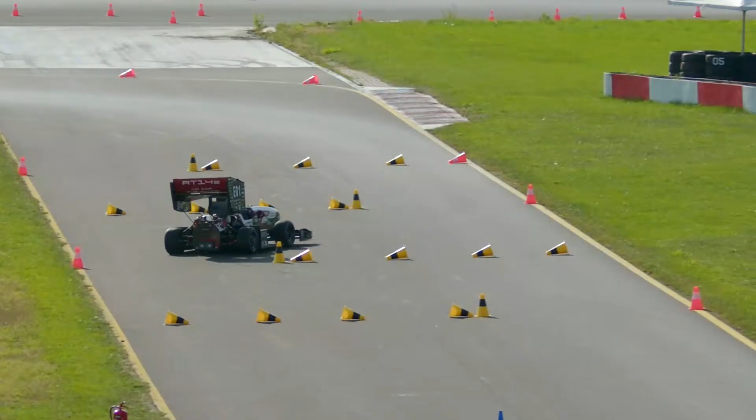The name Formula One came because the teams, the motorsport companies, were looking for the best formula, the recipe to create the car number one, the best car. And this is what these incredible minds, innovators and students, engineers are doing here. They're building cars day after day, night after night.

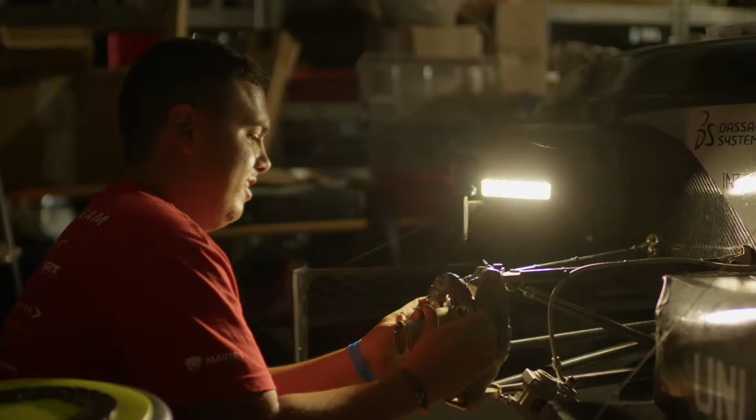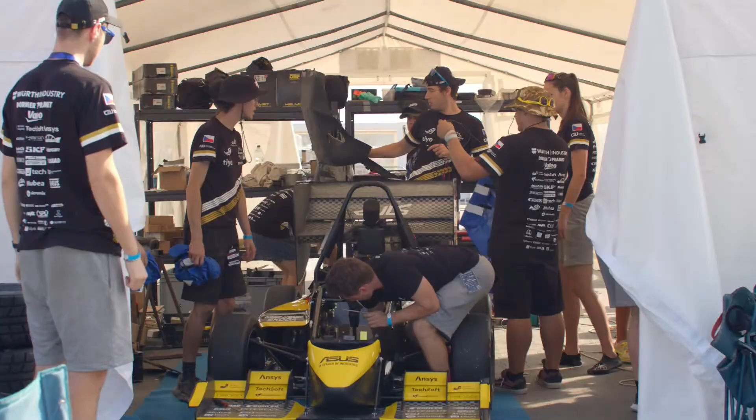Student teams from around the world build their own designs of racing cars, which they race on the track. But to participate in these dynamic competitions, they must pass rigorous stages of technical inspection.

And what is most valuable to them is feedback. Did they do what they did well? Does it even make sense from the perspective of how the industry perceives it?

I cannot imagine how incredible it feels for them to have been working years on a car and then see it on the track actually running. So I think the emotions today are going to be running super high.

These students had an absolutely incredible blast being able to finally end the season with a truly fantastic performance, and they really showed off on that track. On one hand, there was the competition regarding times, but we also saw that they were really enjoying themselves in terms of the overall execution.

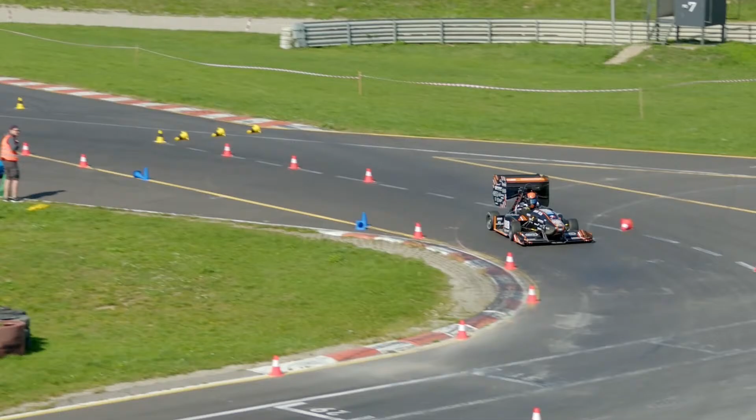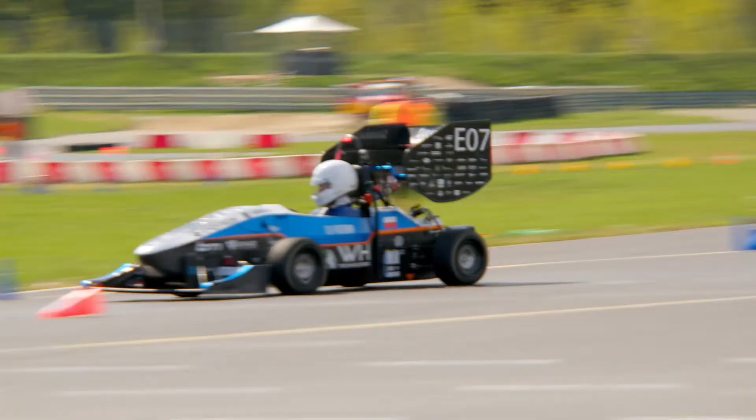Make your dreams come true in motorsport. Formula Student Poland, where the future of motorsport is born.

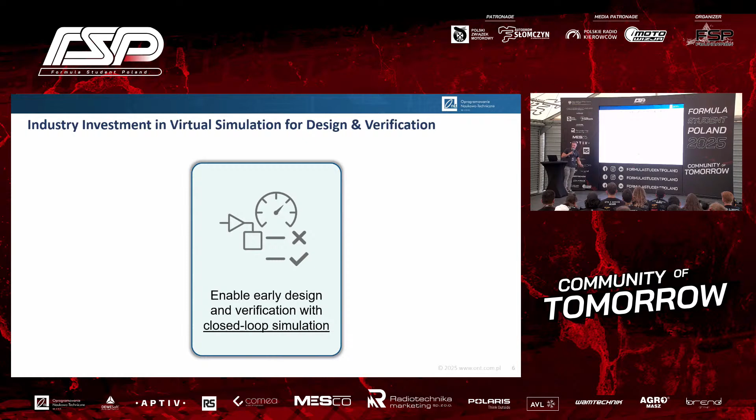So to begin with, let's mention some industry trends that are driving our recent investments in virtual scenarios. First, a primary trend is the need to leverage simulation for early design and test. This is especially true in the context of closed-loop systems that need to take into account vehicle dynamics. Engineers want to reduce the amount of time spent on physical testing in the vehicle.

Second, there are many different driving simulation tools on the market today, both commercial and open source. All of them can be used during the design and testing process. The ASAM organization has been working to make it easier to interoperate between driving simulation tools with standards called OpenDrive or OpenScenario.

Another trend is that to maximize simulation value, the scenarios under test must be representative of real-world scenarios. What does this mean? We see a lot of companies working on taking logs from recorded data and building equivalent virtual scenarios for the simulation.

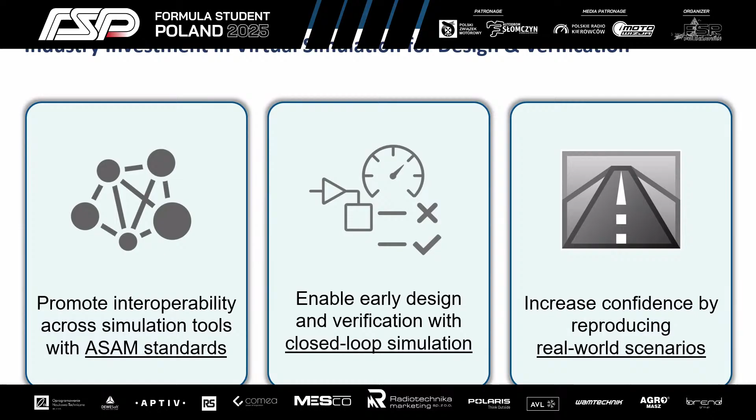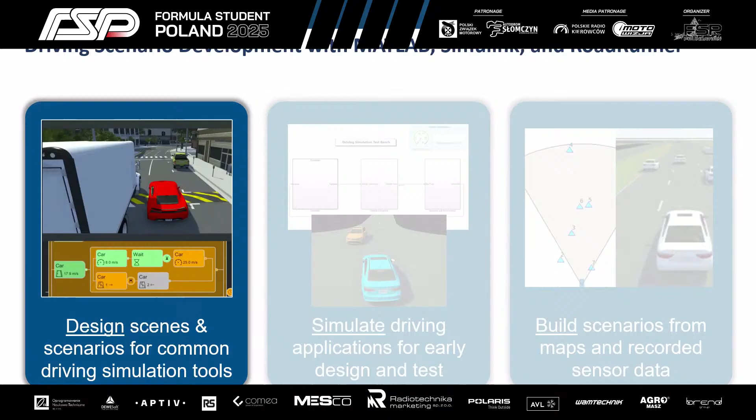And we have an answer using our tools for each of these trends. Today, in this presentation, we will discuss the value of virtual scenes and scenarios, and I'm going to introduce our RoadRunner tool that integrates with common driving simulation tools, and also, of course, MATLAB and Simulink. I am also going to show some example applications from industry and from the Formula Student competition. My friend Kuba will later tell you more about building and simulating vehicle dynamics models in the next presentation.

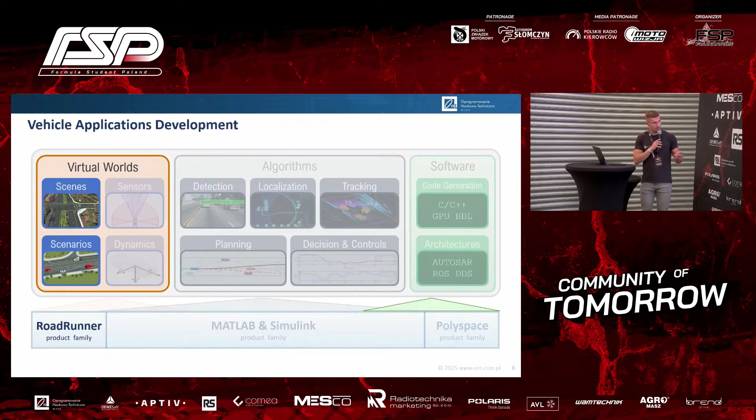So now let's compare the application called Driving Scenario Designer from MATLAB with RoadRunner tool. Scenario Designer is an interactive app from Automated Driving Toolbox and allows us to design simple road networks with intersections, some basic elements like walls or traffic barriers. In terms of scenarios, we can create them manually by selecting coordinates, and the actors are interpreted as cuboid objects.

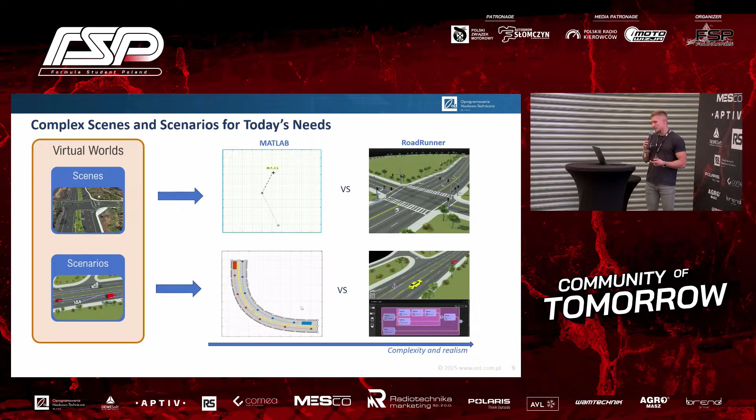On the other hand, RoadRunner tool can consist of advanced state machines and logical expressions, lines, actors, some lane following behaviors, and all these scenarios are presented in photorealistic reality with high level of fidelity.

Someone may ask, what's the main purpose? As you can see, there is a timeline. Automotive engineers need a virtual world with lots of details to obtain a credible environment for realistic situations and road traffic. But here, in the case of collision, there is only some error message or pop-up without incurring losses or sacrificing people's health.

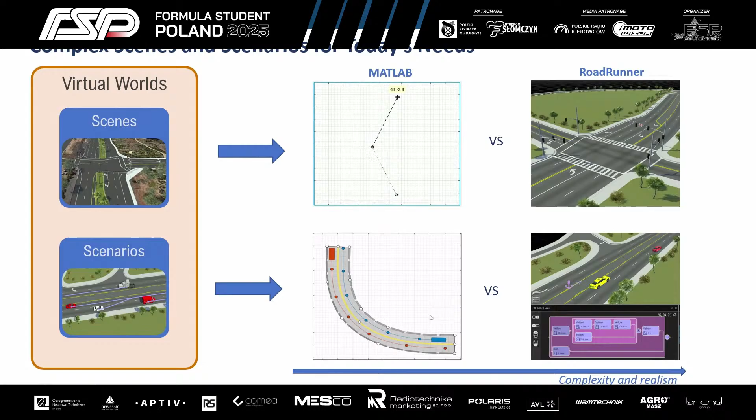And keeping these elements in mind, now I'm going to explain RoadRunner products in more technical details.

So this environment lets you design a road network that can include intersections, highways, urban buildings, terrain, programmable traffic lights. All these things can be controlled using dimensions, cross-sections, lanes, angles, etc., numerical values. And RoadRunner can have a double role.

Due to its independence, it is used by engineers working in external simulators and physics engines, but of course also for MATLAB and Simulink needs. The automated driving toolbox from MATLAB serves as the interface between both environments, and we can use specific features from MATLAB like functions, system objects, or Simulink blocks to interoperate between these programs.

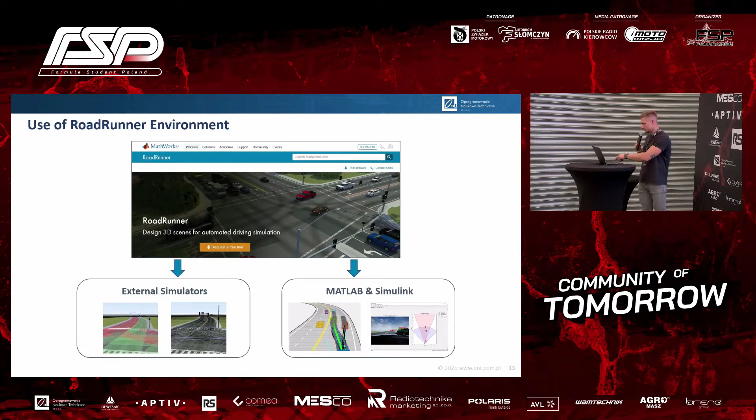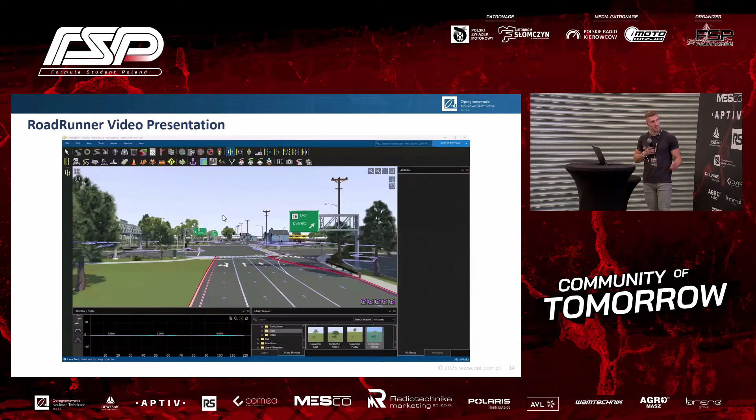And I will now demonstrate basic RoadRunner user interface using a short video. In the upper section, we've got the main toolbar, where the features and tools are divided according to specific functionalities.

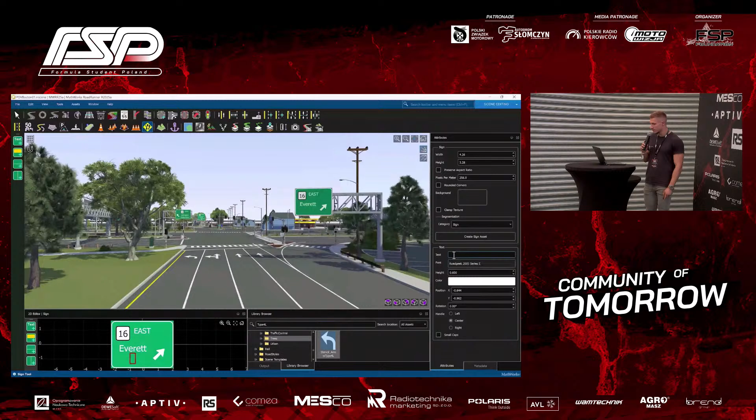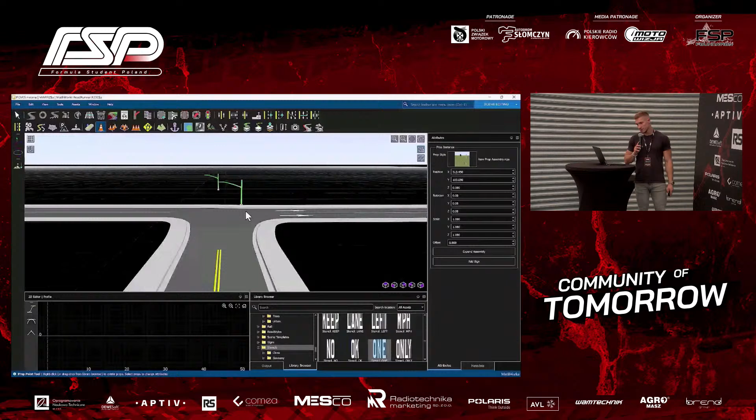There is a working area with the grid in the central section. At the bottom, we can see some extra views, library browser with all the files like additional assets or props. The attributes panel is located in the window on the right side. There you can configure all the parameters, numerical values, and dimensions.

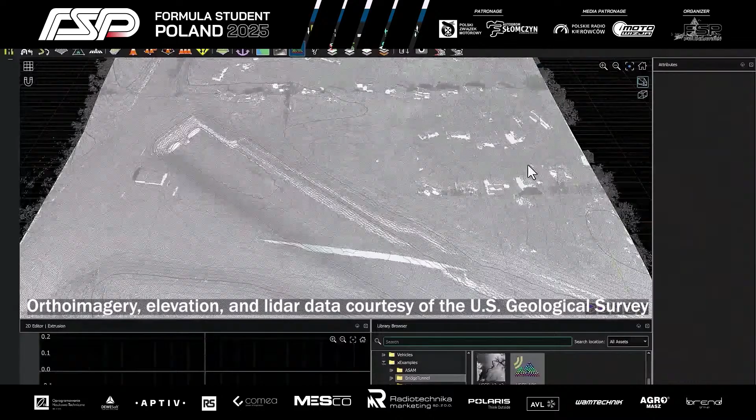And importantly, you can perform all the actions using drag and drop technique, and with addition of some keyboard shortcuts, these features make RoadRunner a really user-friendly tool.

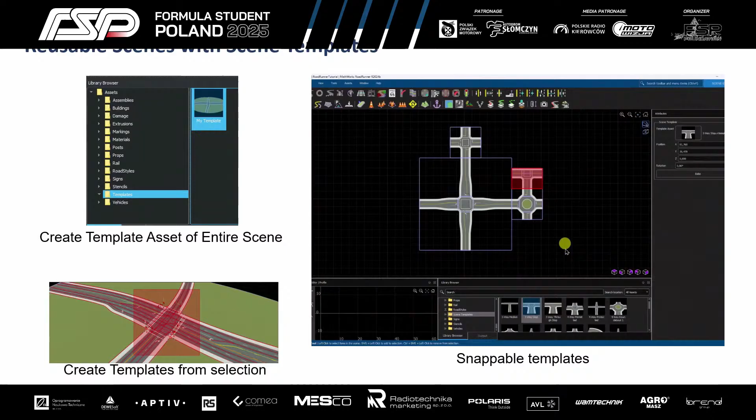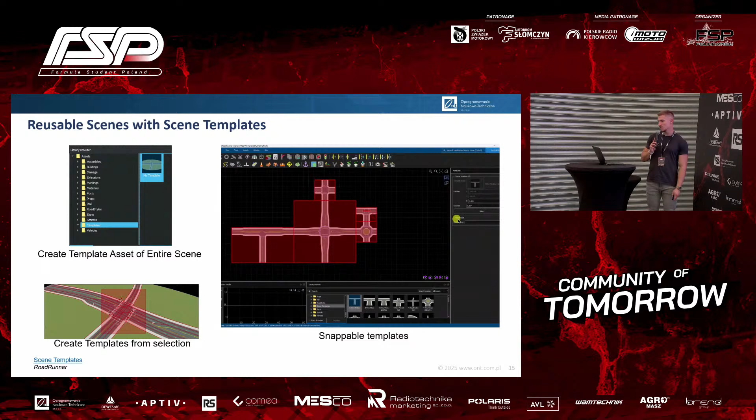RoadRunner also ships some scene templates, which makes it easier to build scenes. In addition to this, you can also make templates from your selection, your asset, for the entire scene. You can also snap templates to form a new scene in a quick and easy way.

Now I will explain the data flow, so import and export possibilities, and all the additional products like add-ons, something similar to MATLAB Simulink toolboxes. The first one, RoadRunner Asset Library, it's nothing but a library of elements like road signs, 3D objects, graphics, textures, etc.

Now let's talk about some import capabilities. We can import scenes and maps from ASAM OpenDrive files for versions from 1.4 to 1.7, which is currently a common standard in describing scenes and scenarios, especially for automated driving or ADAS systems.

In addition to this, we can import OpenStreetMap, OpenCRG files, which is responsible for the shaping of road surface. What's interesting, OpenCRG tool is used by BMW company to edit and create CRG files, which are then later applied to tests of dynamic properties of vehicles, especially the suspension systems and chassis system.

SD maps are also supported, these are low-resolution maps, so we can import them from different formats. It's also possible to import GIS files, so files including some geographic information built in.

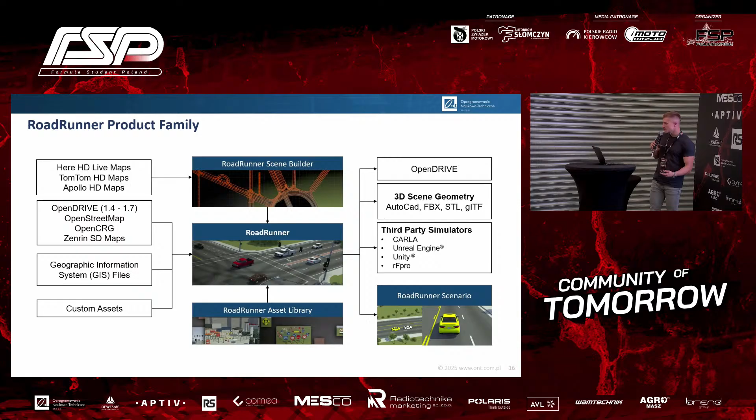And last but not least, we can run our scene with the RoadRunner Scenario, which is a dynamic scenarios editor. It's the most recent add-on, which offers extra capabilities compared to the base products.

So remember this slide. Now on the slide we can see a complete flow diagram including import, export, all four products highlighted with blue color in one data flow diagram.

Let's now discuss the GIS files. Someone may ask how the GIS files are handled in RoadRunner and why do we need them? The answer is simple. After we put them on the grid for a building scene, we literally obtain a template. So we exactly see where are the edges of the road, lines, their shape, distances, and so on.

For example, you can import the racing track and use it as a reference for building your digital representation for MATLAB and Simulink needs. And now let's take a look on the short video.

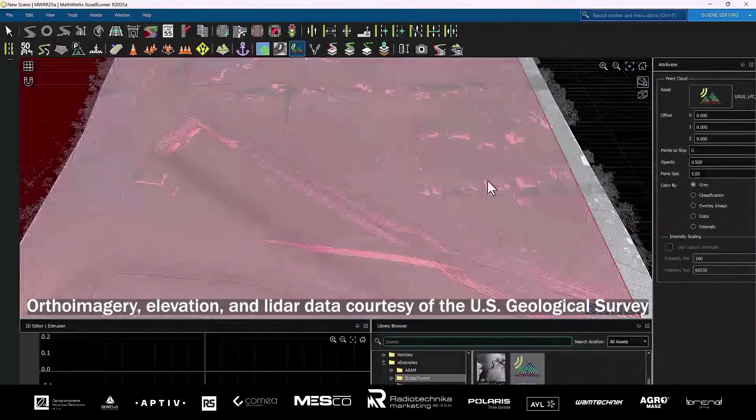Yes, so we can use this scene as a template. And what's more, whenever we have a digital elevation model, it's possible to embed our flat surface on it just by clicking one button. The scene will then arrange itself according to the imported altitude.

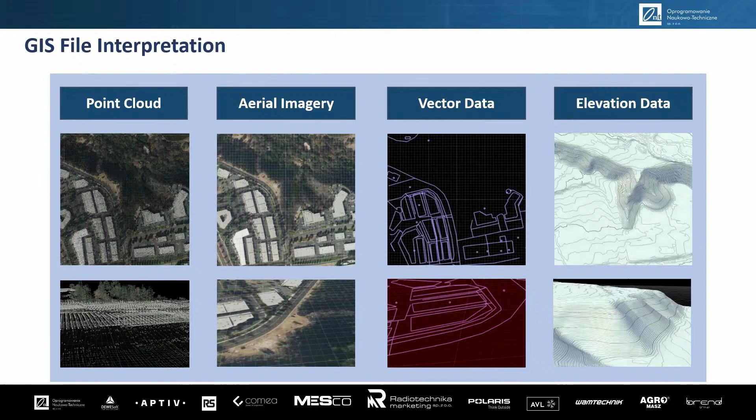Okay, now it's time for the next add-on, RoadRunner Scenario. I'm going to use a quick video. RoadRunner Scenario, with a user interface similar to the base RoadRunner product, allows us to create dynamic scenarios to simulate and test a vehicle in motion.

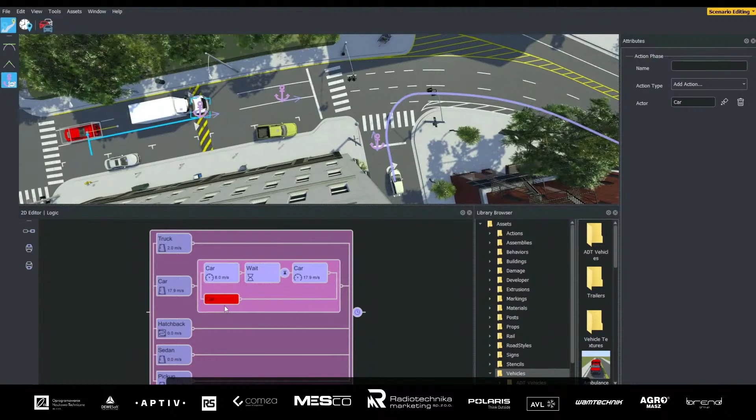It gives you the possibility to place vehicles inside the ready scene, including trajectories and movement. You can also define vehicle behavior in something similar to state machines - a behavior logic model which we can parameterize. We can also define this behavior using built-in MATLAB and Simulink functions.

A programmatic interface is also available to users. What does it mean for scenes and scenarios? There are dedicated MATLAB functions to generate, simulate, export, import, etc. If you want to use other languages than MATLAB, such as C++ or Python, feel free - it's possible through the gRPC framework, which is a popular API for client and server communication between desktop applications.

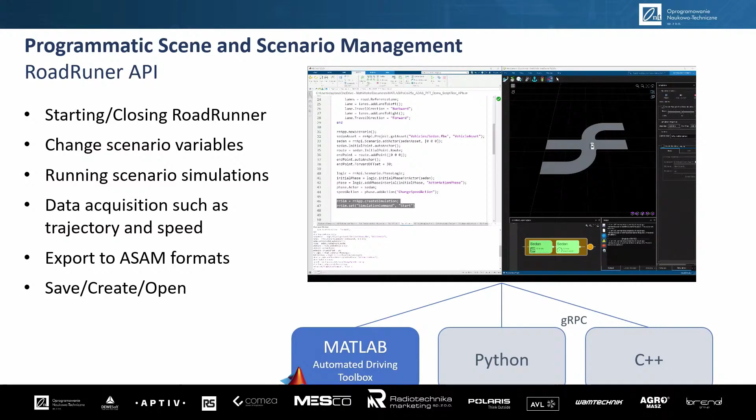Now something related directly to your topic. All these features allowed the Dynamis PRC Formula Student team from Polytechnic University of Milan to create a complete driver-in-the-loop simulator. Dynamics and control were implemented with MATLAB and Simulink, and the racetrack was designed with the RoadRunner environment. You can read more from the attached link, but now let me present a short part of their story.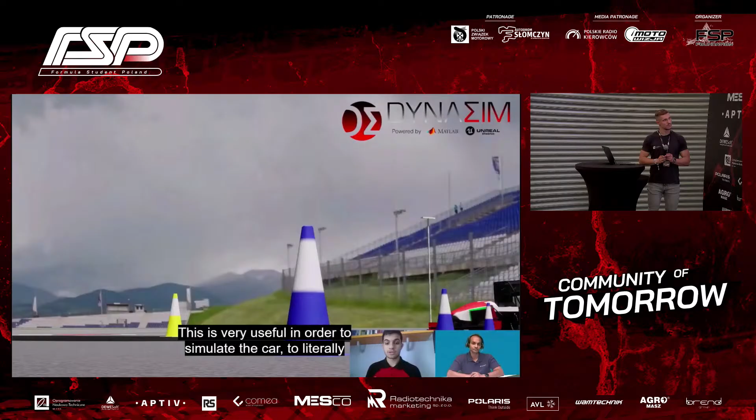This is literally a driver driving our car in a Formula Student track. We've been developing the physics of the model, the graphics, the camera position, the custom scenery, the sounds, the custom HUD - everything is custom and done by the team. This is very useful in order to simulate the car, to literally drive it and feel the car while it is still being built or while some development is required.

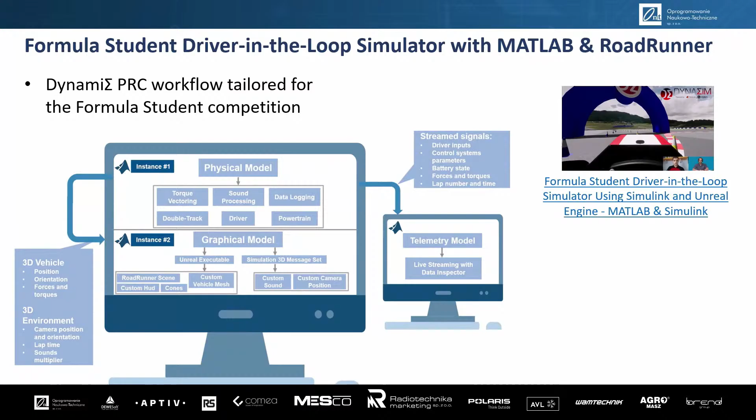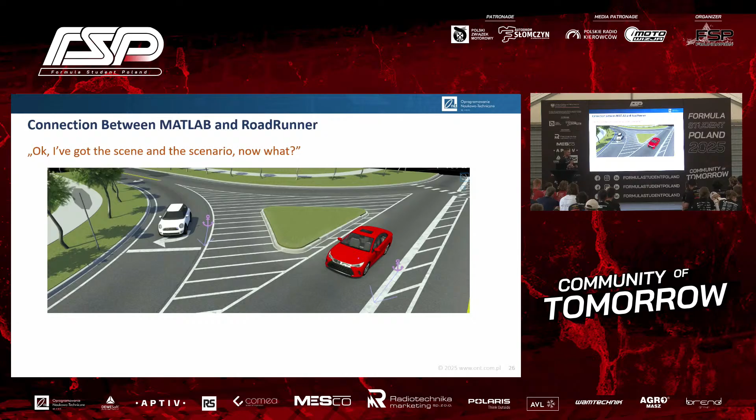Okay, so coming back to real applications. Imagine a situation in which we have just designed a nice scene and a complicated scenario with some logic. It can be exported and our job is done. But we can go a step further. In this situation, we can read the data, for example the ones presented on the slide, then pre-process it using external software like MATLAB and Simulink, and then control the ego vehicle under test in a closed-loop system.

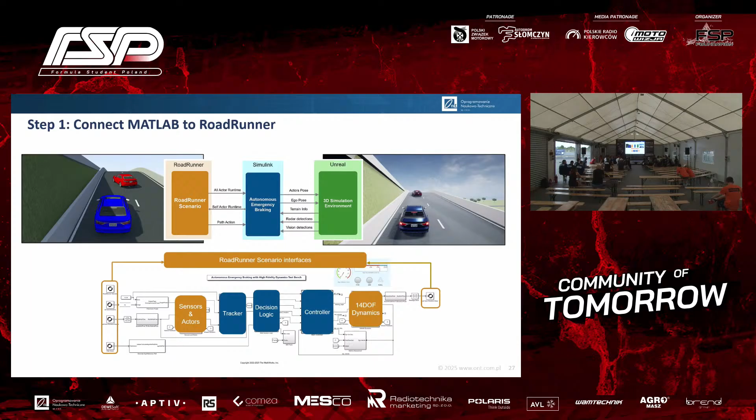Basically, a Simulink model can be the center of this process. This particular model consists of complete vehicle dynamics, control system, and sensor data preprocessing. But I'm personally going to focus on the 3D environment part, which includes a RoadRunner scene used in a simulation environment based on Unreal Engine. Co-simulation between these tools allows us to take advantage of every single one - for example, easy scene and scenario creation in RoadRunner, Unreal Engine physics reliability, and Simulink design and simulation versatility.

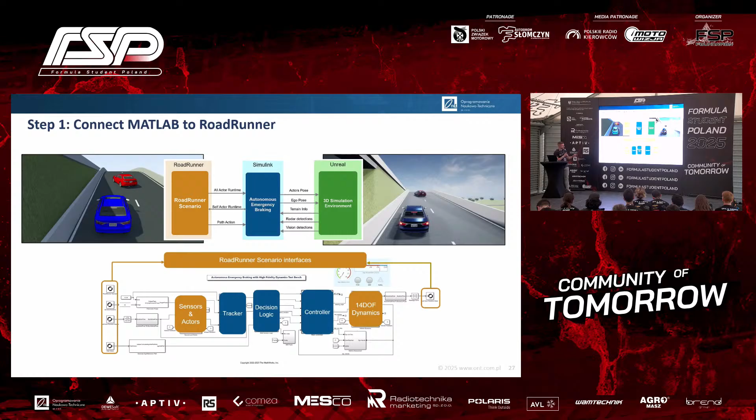So now let's investigate the component responsible for visualization. To configure a simulation 3D engine, you simply need one block to configure a scene source, and a few extra blocks to control vehicle visualization and sensors to measure necessary values and receive them as feedback from the simulation. You can choose between a few default MATLAB scenes, RoadRunner, or independent Unreal Engine executable files.

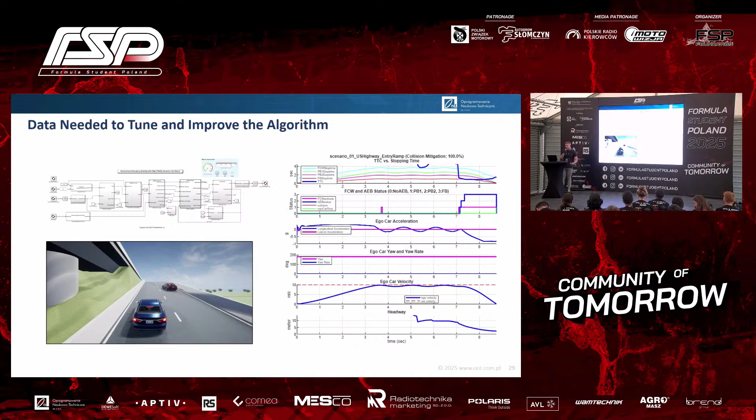All these blocks come from MATLAB toolboxes related to driving and developing vehicles, like Vehicle Dynamics Blockset or Automated Driving Toolbox. As a result, after the simulation run, you can access all the important measurements and monitor the vehicle behavior. Photorealistic visualization makes the investigation easier to interpret, easier to analyze the data, and what's most important, without the need to build a physical prototype at an early stage of development, which reduces cost, risk, and of course, time.

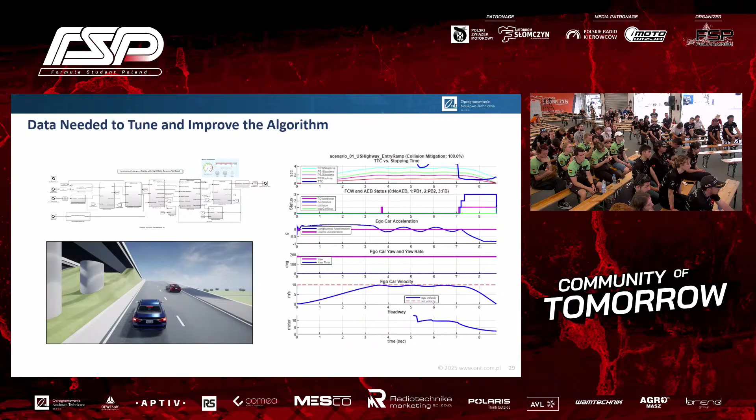Earlier I mentioned the driver-in-the-loop simulation created by the DynamiΣ PRC team. A similar example can be done using a real-time computer that allows us to have great numerical performance, which is hard to achieve using a normal PC due to hardware limitations. Vehicle dynamics and control is deployed on a SpeedGoat machine using the Simulink Real-Time add-on. Driver input comes from a Logitech gaming steering wheel, and the visualization is launched on the host computer. Using real-time devices is a common approach in automotive and other industries like aerospace or energy, especially for hardware-in-the-loop testing and rapid control prototyping. Let's now see a quick demonstration video.

So as you can see, it's real and it works.

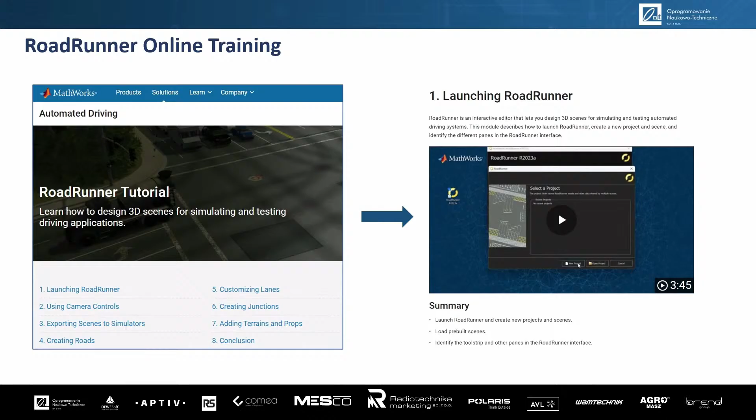Coming to the end of the presentation, for those who would like to learn more about the RoadRunner environment, there is free course material available on the MathWorks website where you can find basic functionalities in an easy way based on recordings and live instructions. You can go a step further, which I highly recommend: a training called Designing 3D Scenes and Scenarios with RoadRunner, a 2-day course providing almost all the knowledge and best practices on this topic. On the slide, you can see a course outline with areas covered during the course.

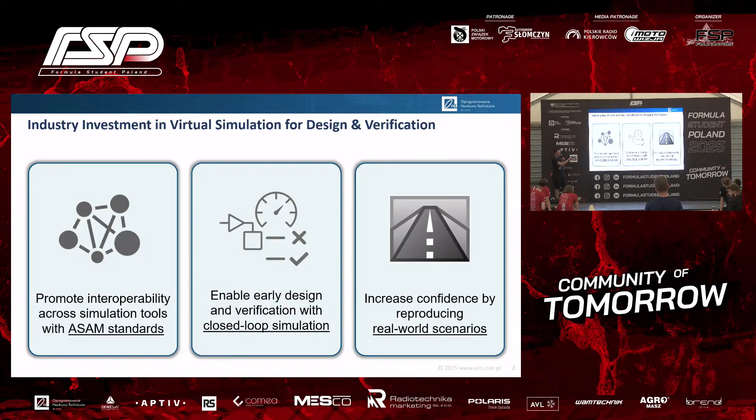Well, you may feel free to use many even third-party toolboxes, open source tools. So we are on the way to standardize it fully, as my colleague said. And in the end, of course, your model will be worth nothing if it doesn't apply to real situations, to a real environment. So that may be captured by the third point.

As you've seen, all of those capabilities are already provided by MathWorks tools. I will focus now on simulation for driving applications, especially modeling physical objects. Here we can say a car.

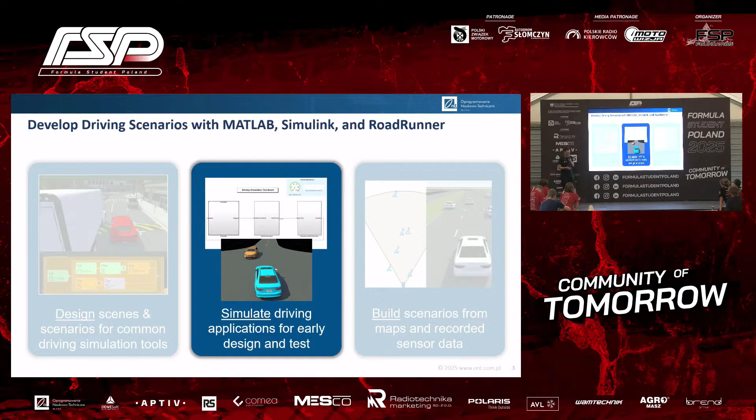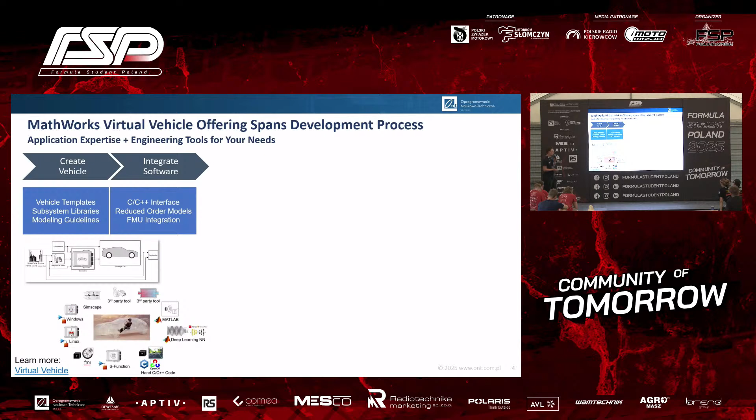So what can we do in our tools? First, we've got several templates, libraries, guidelines, so you're not alone with your knowledge. You may choose already prepared solutions from MathWorks. Then you may integrate with external software to make deeper studies. You may author your own things, you already know it, for example, RoadRunner.

Then, of course, you've got plenty of data sets, and what can you do with that? You can analyze this data, and these analyses may be automatic. You may even use deep learning methods to get some insights which shouldn't be visible at first look.

And in the end, you may deploy your model on your hardware target to make your HIL tests, to make your digital twin, or run it on your own controller. This is enabled by MathWorks coders: by Simulink Coder, by Embedded Coder, by Simulink Real-Time, and so on.

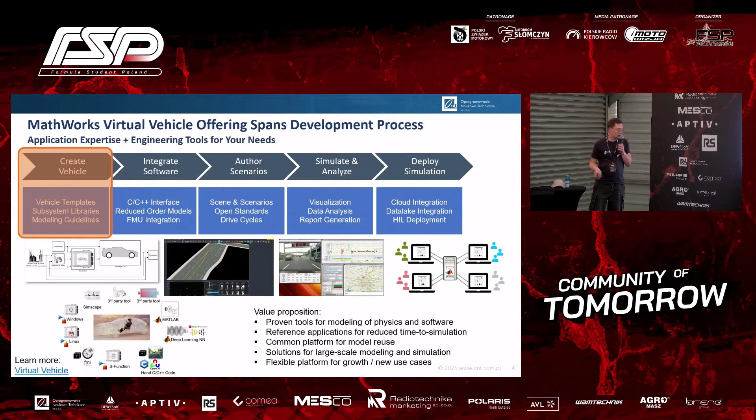In today's speech, I will focus on creating vehicles. So what we will do today: I want to show you how to quickly generate your model, and then, when you have the generic model, how to customize it to your purpose. And then that's not the end, because MathWorks has some tools to enhance collaboration over the model, so you needn't work on separate models. You may cooperate with ease by using MATLAB projects. And in the end, of course, how to simulate that model.

So, when we talk about modeling, it is trying to capture some real things in mathematical language. It may be very easy, like when you have your vehicle and you want to know the gravity force — you may just multiply it by the gravity acceleration factor, and you're done. So a model may be simple, but then you may see that reality is not so simple every time. There are drag forces coming from the vehicle speed, and it may vary over time.

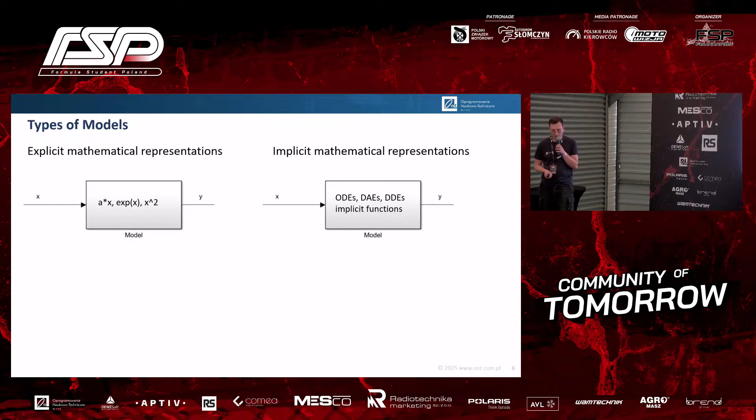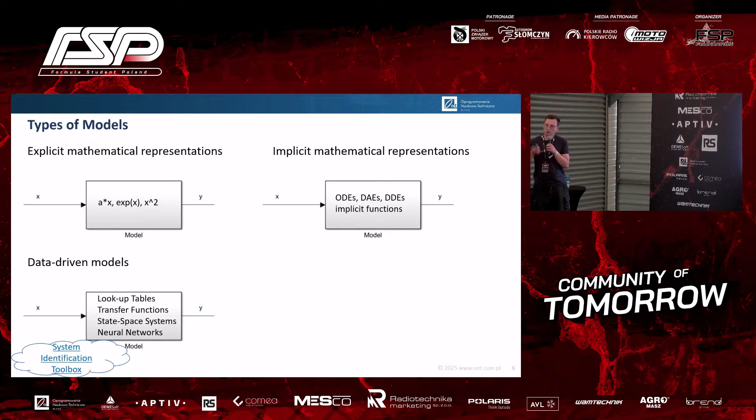So you need to go for more complex approaches, such as ODEs, DDEs, and some implicit functions. It may be the implicit approach, but it will be worth nothing if it isn't tightly tied to your real object. The point is that you will get several sets of parameters, and who knows what these parameters should be. To address that, there are several options you may focus on: you may base it on other modeling like FEM analysis, you may do experimental work and get input and output data sets, and approach system identification — automatically parameterizing your model to be very close to reality.

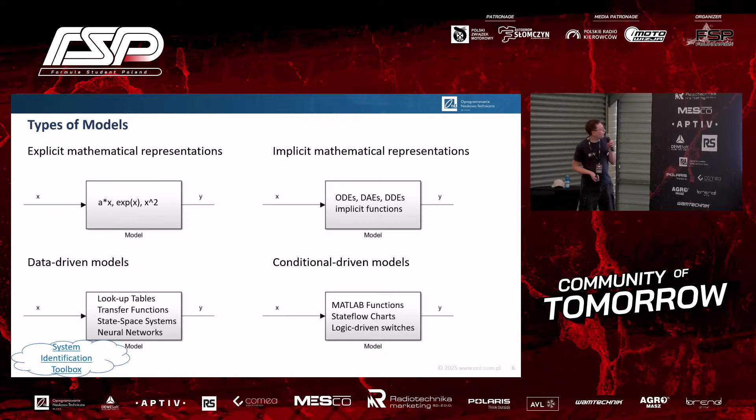And of course, one advantage of Simulink is that you may easily model logic by using the Stateflow chart, by using MATLAB functions, with commands like if and for. So it may be a conditional-driven model. It may look easy, but when we're talking about a car model, it is a very complex architecture, and it takes a lot of time to model every element of that model.

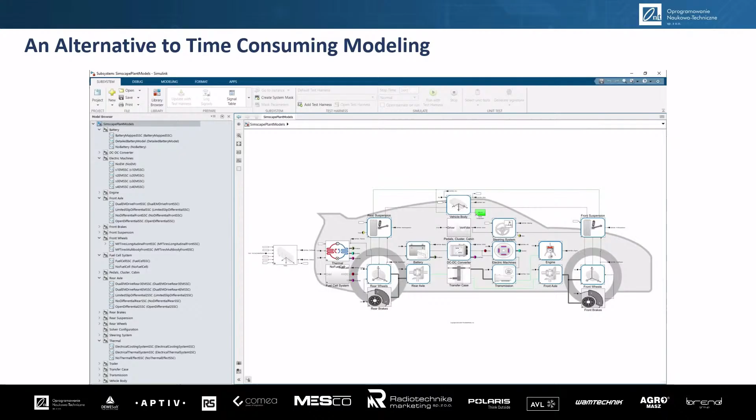Moreover, it is needed from time to time to make verification of other variants. So possibly you need several variants of the same model, so another hundred hours you need to spend to model it. So it sounds pretty cool, yeah? Instead of that, you have just one app which does all these mechanical steps for you. It is just one app in which you may set your parameters, choose your powertrain variant, and get the model, then customize it, and so on.

How simple is it? You may see in the next video. So let's start to talk about model generation.

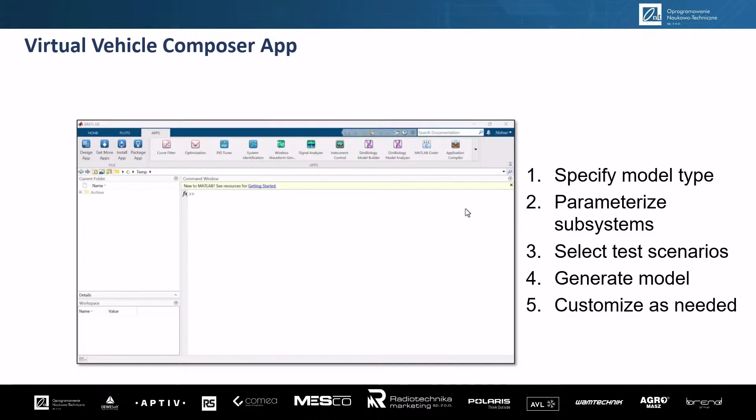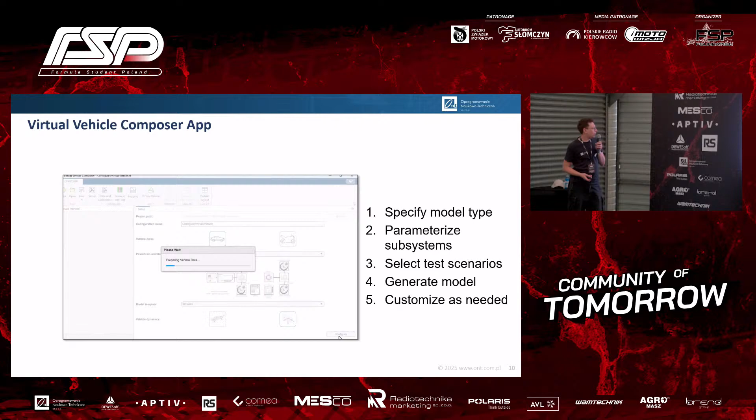We've got plenty of apps. When you go to the main MATLAB window and to the apps pane, you will get over 100 apps. Then you may choose the Virtual Vehicle Composer app. In this window, you just create a new car, choose the type of car, the type of vehicle, and the powertrain architecture. You may choose between electric, traditional, hybrid, or you may go for fuel cell if you want to. Then the model template and the vehicle dynamics, and you are really close to the goal.

Then you will get your spreadsheet. In the spreadsheet, you may adapt your parameters. You may even choose them from prepared lists, or you may adapt some other third-party results by using the FMI interface to collect it into your model.

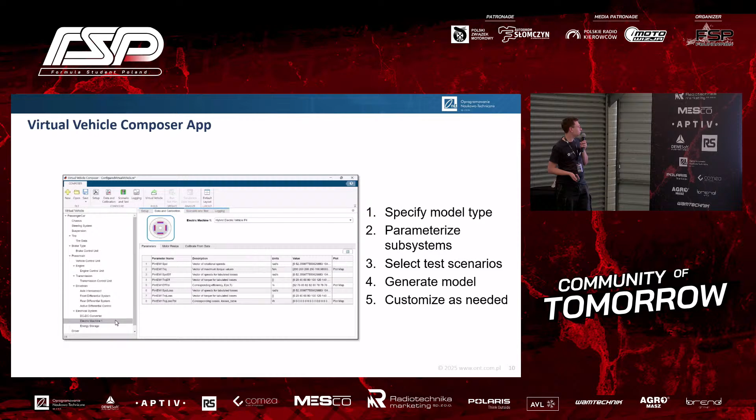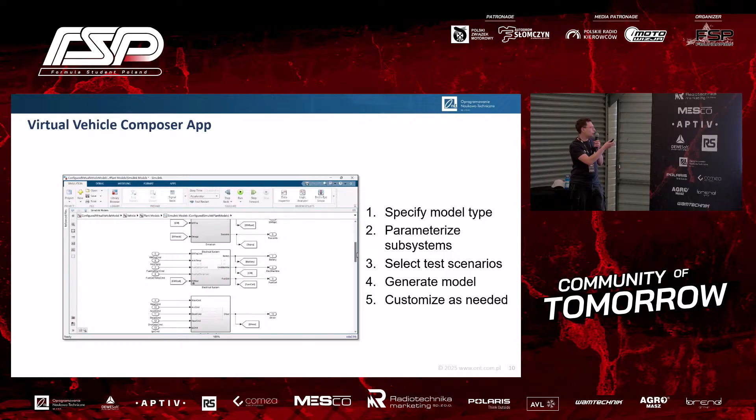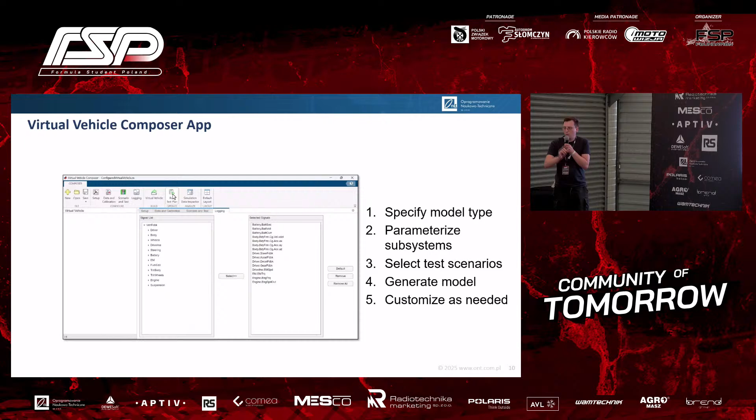As you can see, you've got your model, and it is structured, so your plant is already prepared. You may change any subsystem, you may change just one algorithm inside, and then generate your test. It is the 3D scenes.

Afterwards, you will also get information from the simulation data inspector, which may help you produce some insights to make changes in your real prototype.

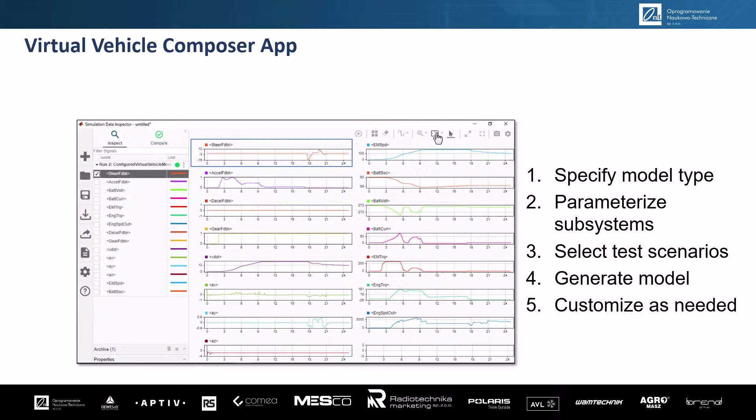So as you can see, it may look the easiest like that. Actually, to be honest, when you go to the easiest architecture and the easiest dynamics, it takes several minutes to get the full model.

And you may ask, is that model real? Is that model really close to the real environment? Fortunately, FEV is a corporation who made the laboratory tests, tested all these parameters, so they are pretty close to the benchmarking data.

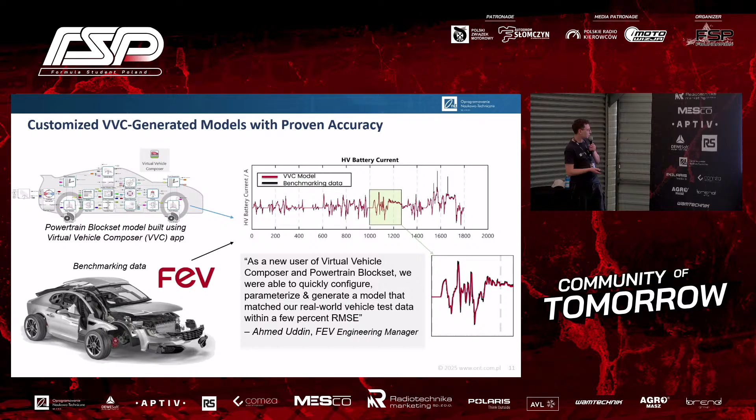Or you may go inside, you may try to change just one algorithm to test it. This solution may be really challenging to test, but here you'll get the full vehicle model, so you may change just one algorithm, test it in the full vehicle.

And of course, you may use this based on Simulink, but you are not limited to that because of some integrated C code, S function, FMUs. You may implement co-simulation with third parties with ease.

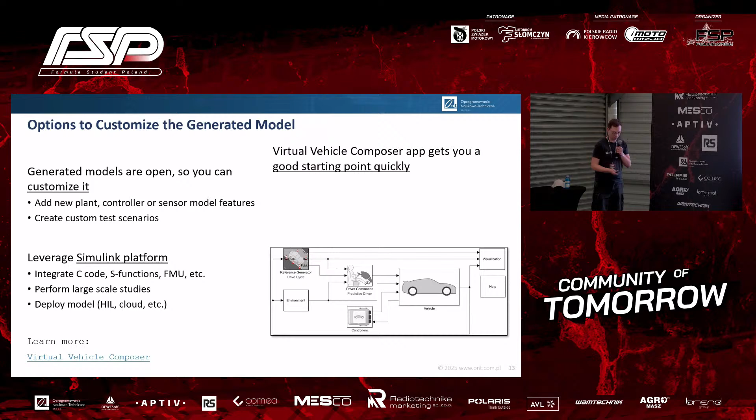As I said about spreadsheets, usually these models related to motors, to engines, have the proper set of parameters called lookup tables. These lookup tables are multi-dimensional. So you may generate them automatically by using the Model-Based Calibration Toolbox.

If you've got your own spreadsheet, you might easily generate the lookup table suitable to that model.

And you may also use Simscape, because Simscape may give you more insights about your model. So you may go into more details. In this case, you may model your tires, you may model the forces between suspension.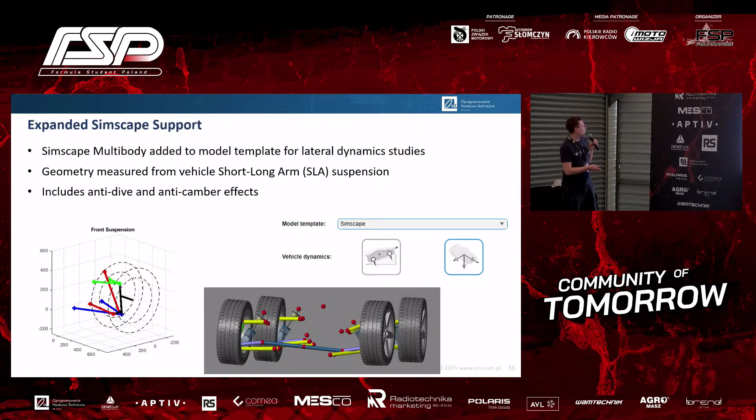Now I should play the video for you, but possibly it may not work. But here you have the video.

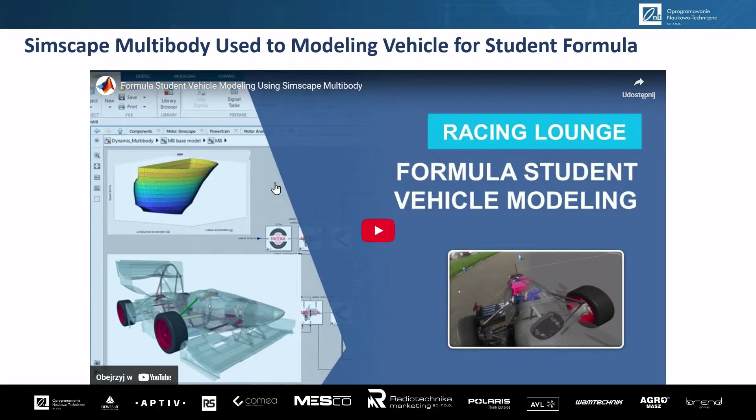A great advantage of the multi-body package is that you can actually and graphically see what the car is actually doing, so the debug time is also further reduced. Yeah, and similarly, I think you can perform different track simulations or closed loop simulations as well. So yeah, perfect, this is great, Nicolo.

Along with that, this is one thing, we are having a simulation where you are visualizing this, but at the same time, the data that you need can also be logged to different sensors which are there in the multi-body. Or if you're using different joints, the joints have sensors to sense the forces, acceleration, velocity, and other parameters. Perfect.

So Nicolo, can we do one more thing? Can we have one closed loop simulation as well, just to have a look into some kind of track simulation? Yeah, for sure.

Apart from open loop maneuvers, we can also perform closed loop maneuvers. In this way, we can perform lap time simulations of the various tracks that Formula Student is composed of. In this case, we are going to perform a simulation of Formula Student Germany Autocross.

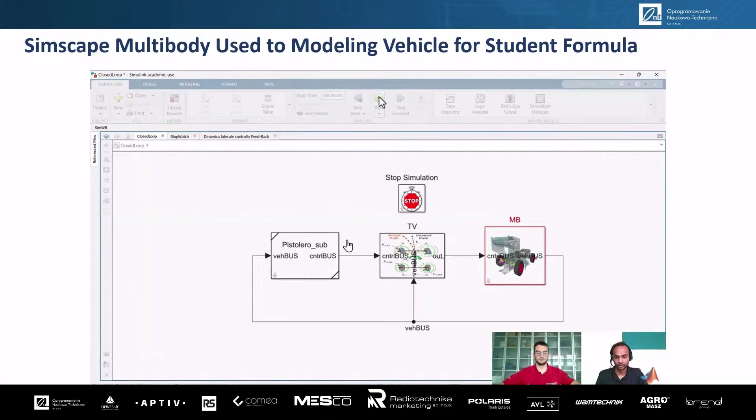Perfect, so this is quite helpful. With this, we have covered the closed loop simulation, we have covered the open loop simulation, and you also walked us through the whole subsystem, how we have built it. Okay, we may stop.

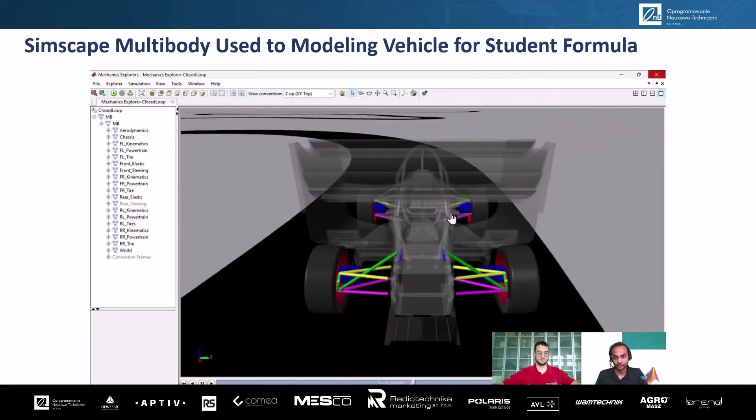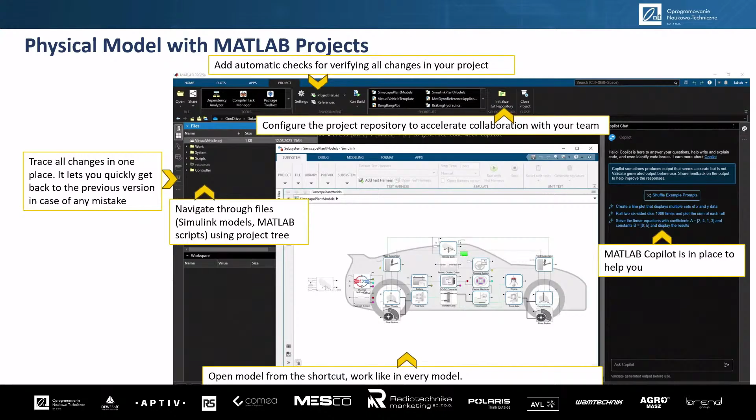Okay, so we were talking about customizing your model, and now let's talk about MATLAB project. It is a really nice tool to make your collaboration on a higher level, because it is really easy configured with the Git repository.

From the MATLAB point of view, you may trace all the changes. You may merge your models when it is developed in parallel, and from the 25a release you have a very nice friend called MATLAB Copilot, and you may ask it questions to get advice.

How to set that project as a source control? It's really easy. You may see that you may just choose to use source control and simply add your project to the proper variant of repository.

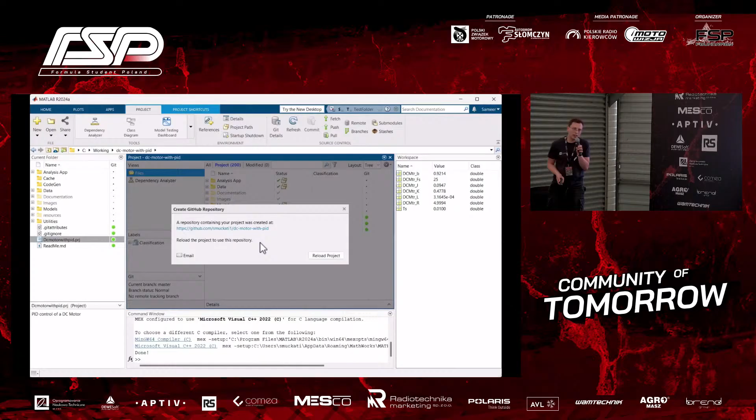We choose here GitHub by inserting your credentials. You will get your project right in GitHub in a minute, as you can already see.

So the last but not least is about the simulation, so how to simulate your model. There are several ways, because you may feel free to customize.

You may directly set this scenario from the VVC app, but you are not limited to that. As you can see, you can adapt here the inports and outports. You may adapt these inports with structured commands from a MATLAB script to make several tests in just one script, or you may adapt it to the Speedgoat machine to make your RCP tests or HIL.

As my colleague Mateusz showed you, this driver command subsystem is really nice because you may go for the game wheel hardware by just selecting one option from the list, and you're ready to play with your model.

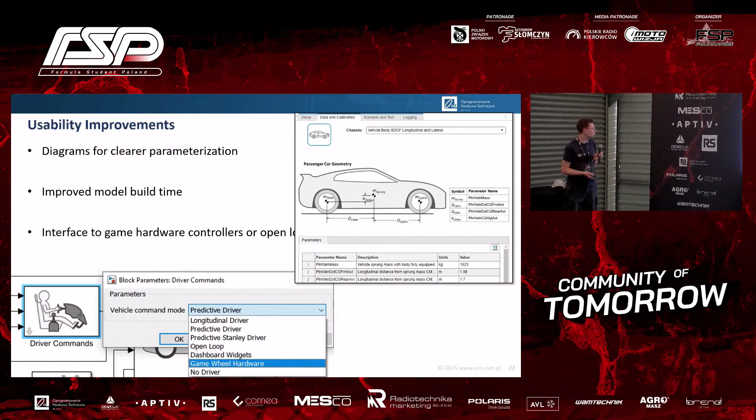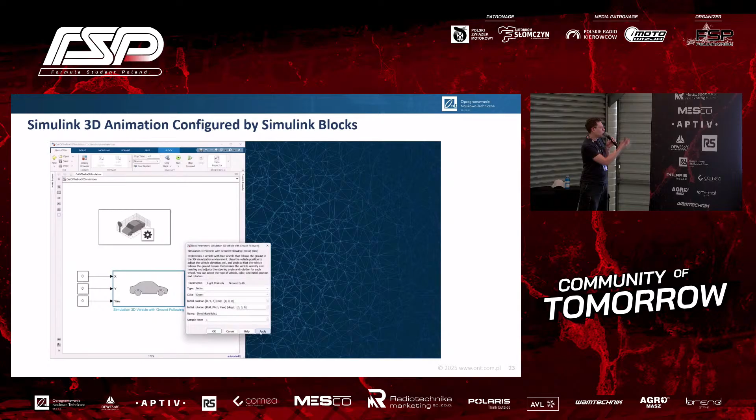It is capable of Simulink 3D animation, in which you may set the weather condition. If you want to set just one typical car, you may do it really quickly to simulate in the engine, or you may apply these inputs provided by the 3D vehicle with ground following, just getting the outputs from your VVC model.

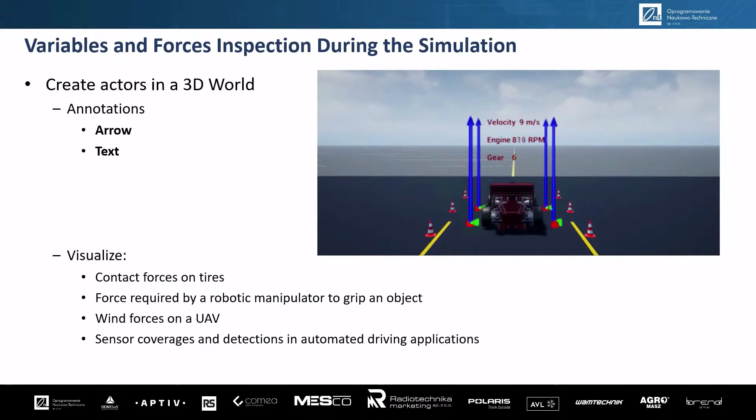Lastly, why do 3D simulation? Because you've got many more insights which are not easily obtained from your real objects. In this example, you may see that you will have all the forces coming from tires, velocities, and so on.

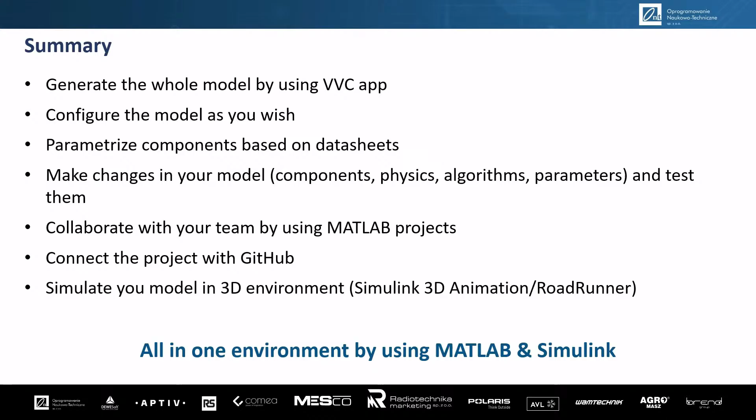So what's next? Next is a summary. As I said, VVC may be useful to quickly generate your model, which is fully configurable and customizable. Then you may make all your changes. The model is in the MATLAB project, so easily configured with your GitHub repository. Lastly, you may simulate it in a 3D environment, and all these capabilities are inside the MathWorks tools, which are already available in campus-wide licenses.